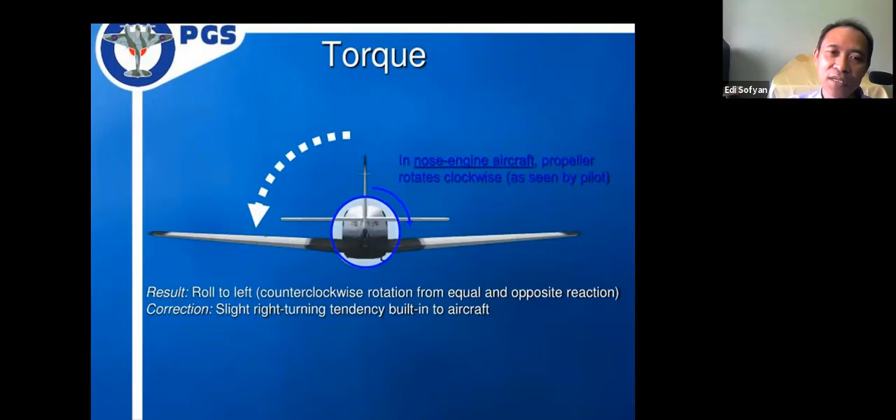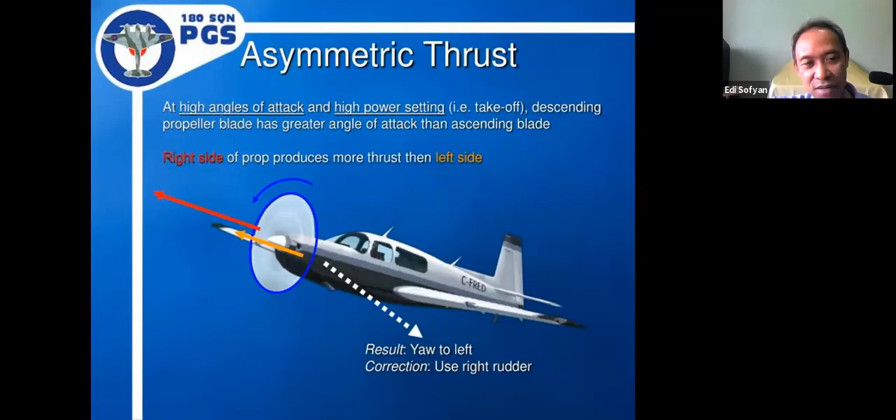Pada saat dia climb, tentunya sudut serangnya yang atas sama yang bawah berbeda. Karena sudut serangnya berbeda, makanya ada perbedaan gaya. Dengan berbeda gaya akan ada yaw, dalam hal ini dia akan bergerak ke kiri. Jadi kompleks, keberadaan propeller itu akan banyak sekali mengganggu prestasi terbang.

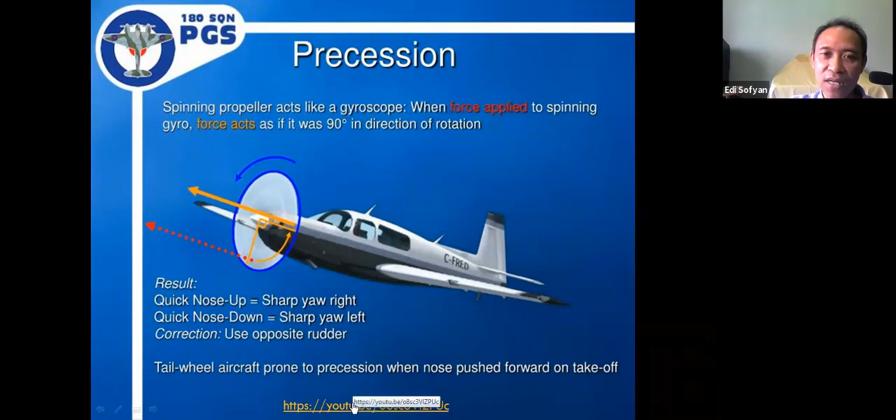Lalu ada yang namanya precession. Kayak gasing lah precession itu, karena dia berputar makanya akan ada gaya-gaya tambahan. Nah, kita lihat gaya-gaya yang ditimbulkan pada saat propeller itu bekerja.

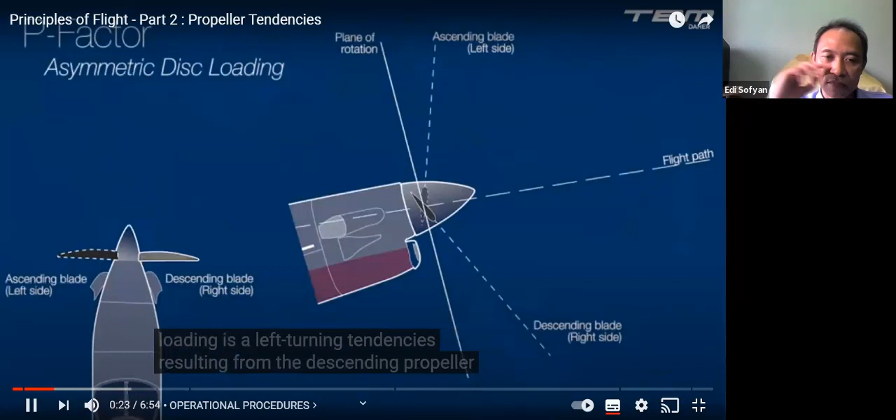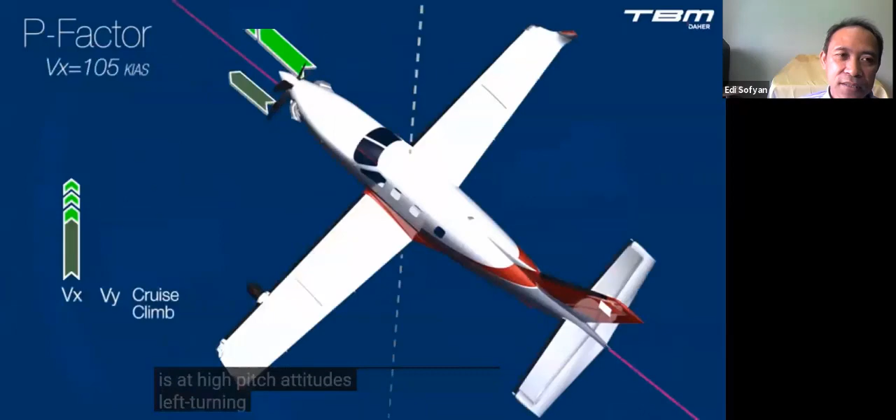P factor, also known as asymmetric disk loading, is a left turning tendency resulting from the descending propeller blade's higher angle of attack, which creates more thrust than the opposite ascending propeller blade when the aircraft is at high pitch attitudes. The left turning tendency is strongest at lower speeds, such as during takeoff roll, after the point of rotation, and during steep initial climbs at lower speeds, such as Vx and Vy.

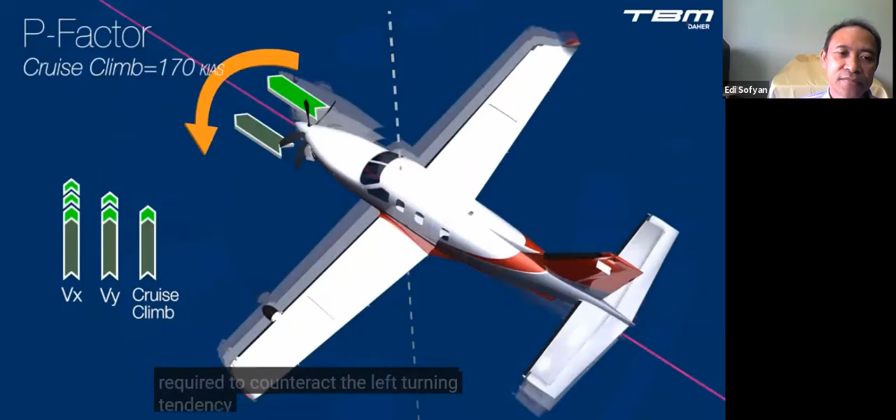As the angle of attack is reduced, less and less rudder force is required to counteract the left turning tendency. The propeller slipstream exists throughout the speed envelope and creates a nose left turning tendency, which is pronounced at lower speeds and decreases proportionally with increases in speed. Torque influences roll about the longitudinal axis, a counterclockwise rotation of the fuselage when viewed from the cockpit. It is also prominent at lower speeds.

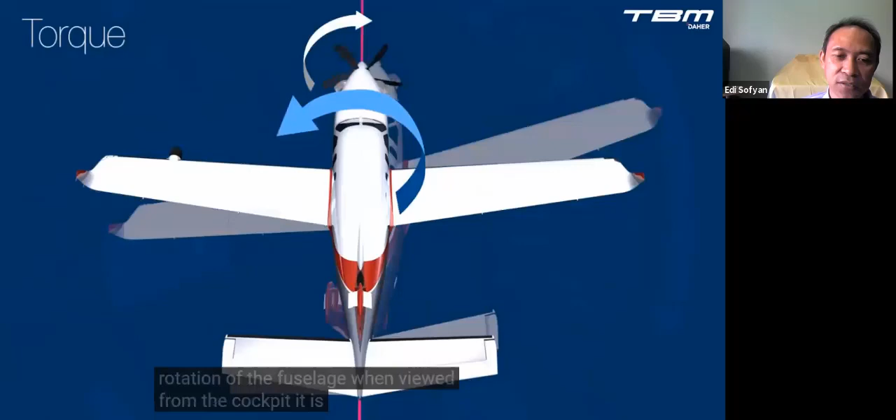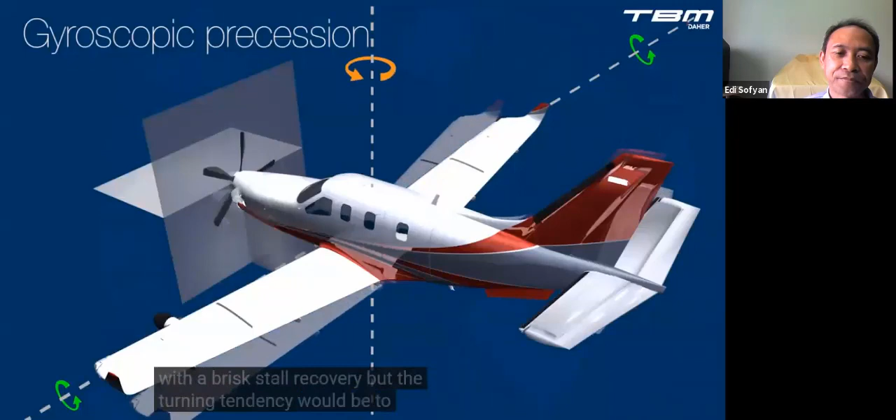Respecting rotation speed and minimum approach speed provides control authority against the effects of torque. Aggressive pitch-up transitions, as in a rapid rotation at takeoff, creates a nose-right turning tendency, gyroscopic precession. The same is true with aggressive pitch-down transitions, as with a brisk stall recovery, but the turning tendency would be to the left. The effect is also more pronounced at lower speeds.

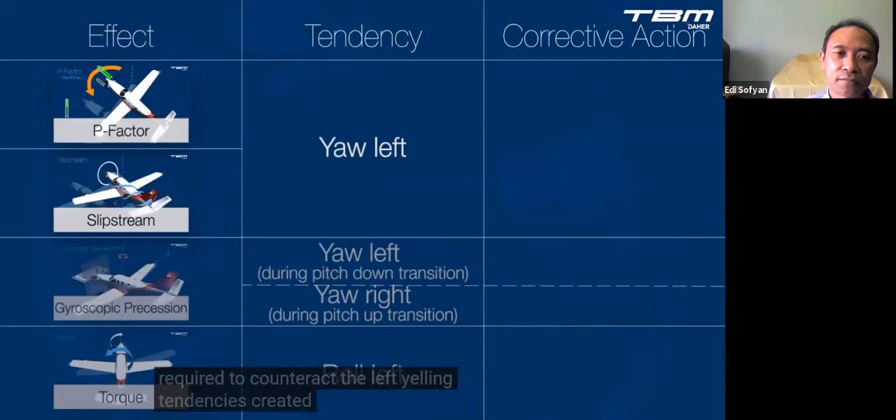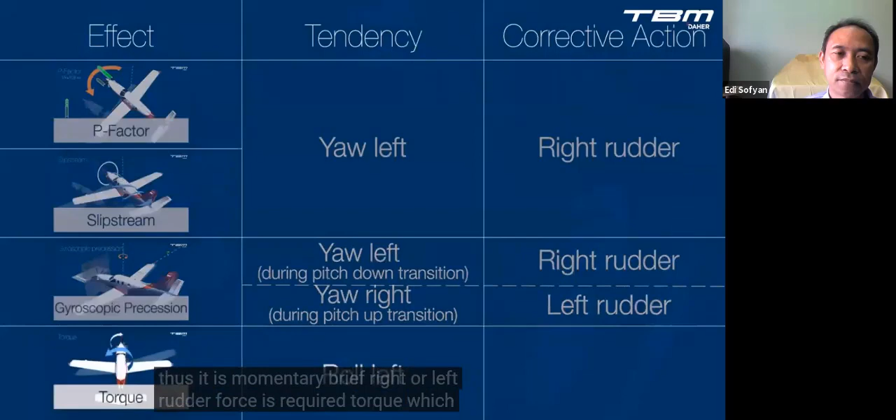Understanding the flight control inputs required to counteract the left yawing tendencies created by P factor and slipstream is straightforward. Right rudder force is required. Gyroscopic precession, another yawing tendency, is apparent during pitch changes, thus it is momentary. Brief right or left rudder force is required. Torque, which is most obvious with an abrupt increase in power, is different.

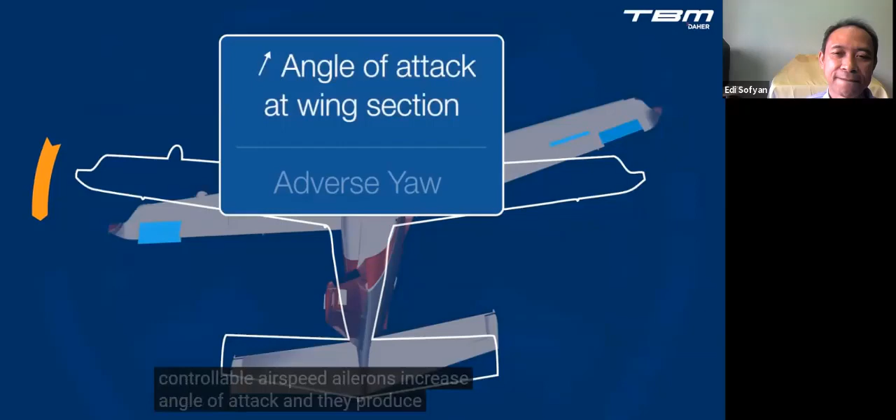Torque induces roll and is strongest when flying slowly, when the weather vaning properties of an airplane are at a minimum. Earlier we mentioned that the primary flight controls used to roll an airplane were the ailerons, which is true. Unfortunately, ailerons have two byproducts which are undesirable when flying at minimum controllable airspeed. Ailerons increase angle of attack and they produce adverse yaw.

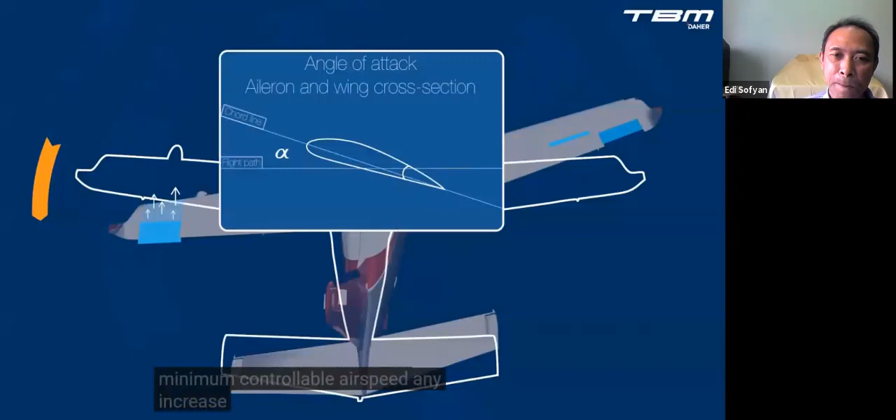On all airplanes, the lifting aileron increases the angle of attack at the associated outboard wing section. Lift is manipulated to roll an airplane. Therefore, if one is truly flying at minimum controllable airspeed, any increase in the wing's angle of attack would exceed the critical angle of attack, resulting in a wing stall.

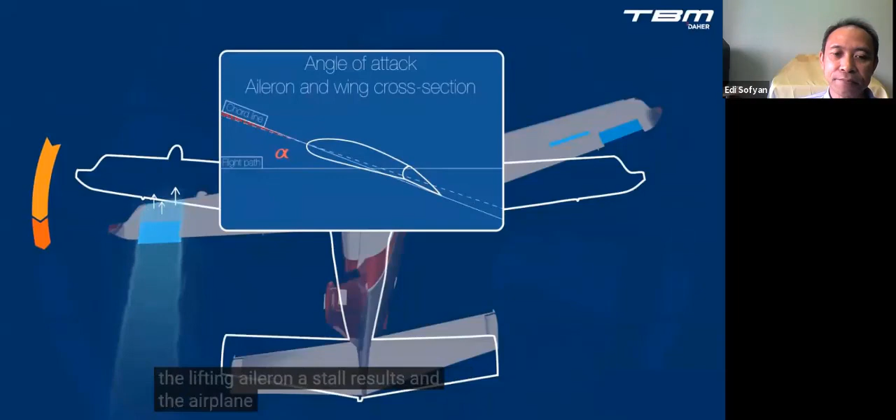Moreover, if the critical angle of attack is exceeded by the lifting aileron, a stall results and the airplane rolls in the direction of the stall. Applying more aileron worsens the situation.

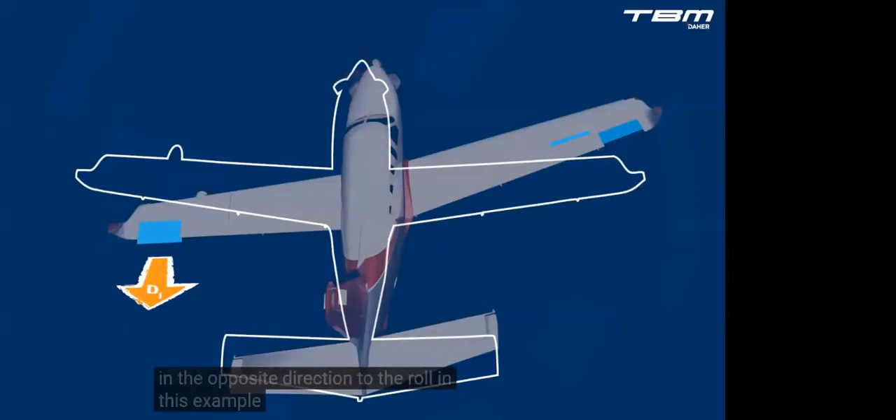Regarding adverse yaw, when increasing lift, an aileron also induces drag, which pulls or drags the nose of the airplane in the opposite direction to the roll. In this example, if one wanted to roll to the right, to wings level, the nose would yaw to the left, against the desired direction of movement. This is also an undesired effect when maintaining coordinated flight at minimum controllable airspeed.

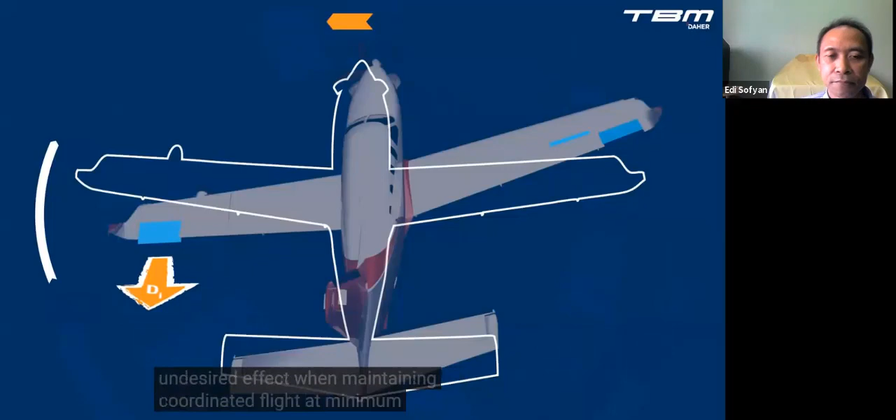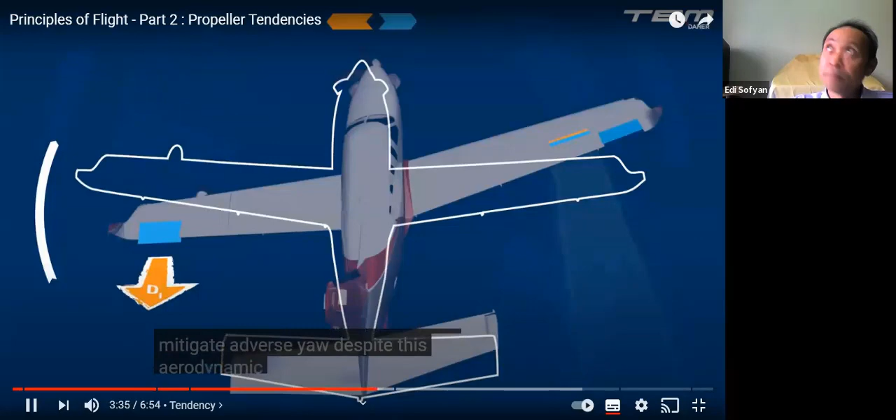The TBM's advanced aerodynamic design incorporates spoilerons, which assist with roll control and mitigate adverse yaw. Despite this aerodynamic advantage, one should manage propeller's rolling and yawing tendencies by giving the rudder priority for roll control when maneuvering in the low-speed regime.

For the purposes of this review, the pitch attitude is set. The indicated airspeed is accelerating through 55 knots. The aircraft is light on fuel. Payload is at a minimum, and only the pilot is on board. Since the aircraft is light, with a high power setting at a low airspeed, the optimum conditions exist for the propeller's effects on the airframe.

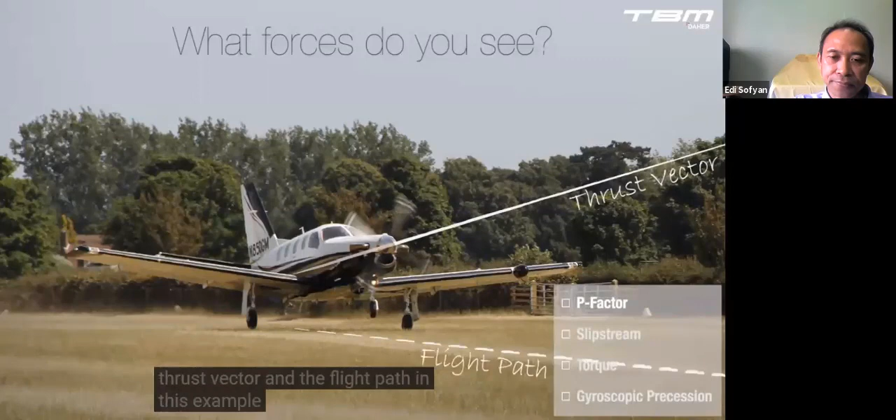Can you visualize the angle between the thrust vector and the flight path? In this example, the flight path is the ground run. With power at 100%, the left turning tendency resulting from P factor is at a maximum. With maximum power and minimum aerodynamic control due to the low airspeed, a strong slipstream is curving around the fuselage and impacting the side of the tail, inducing a left turning tendency. With a high power set.

Jadi ada 4 hal di sini yang terjadi kalau ada propeller di depan: ada P factor, ada slipstream tadi, ada udara yang berputar-putar, ada torsi karena dia berputar, dan ada gyroscopic precession. Jadi ada 4 hal ini yang menyebabkan masalah pada saat ada propeller.

At lower speed, the rolling tendency caused by torque is at a maximum. It is easy to see the wingtip clearance, or look even closer at the difference in the strut compressions. See the rotation of the fuselage. The wide stance of the TBM's main landing gear provides stability.

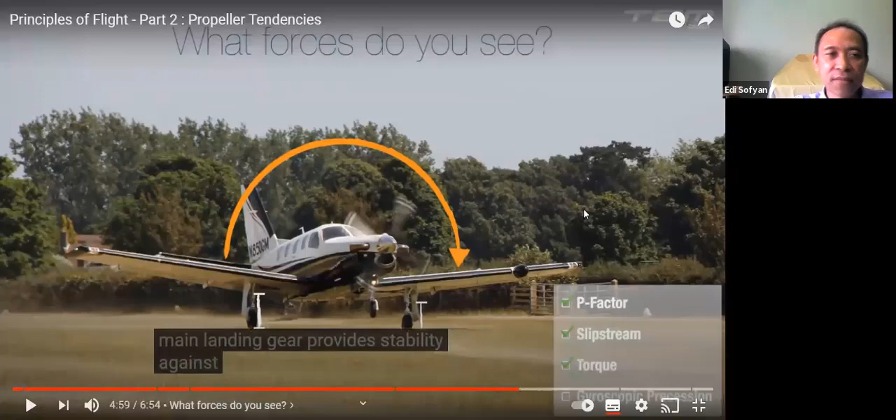Ya, intinya itu, Anda bisa lihat lebih lanjut. Tapi intinya bahwa prestasi terbang itu banyak sekali dipengaruhi oleh elemen-elemen yang ada di pesawat tersebut, terutama kalau ada propeller. Ya, ini ada slipstream.

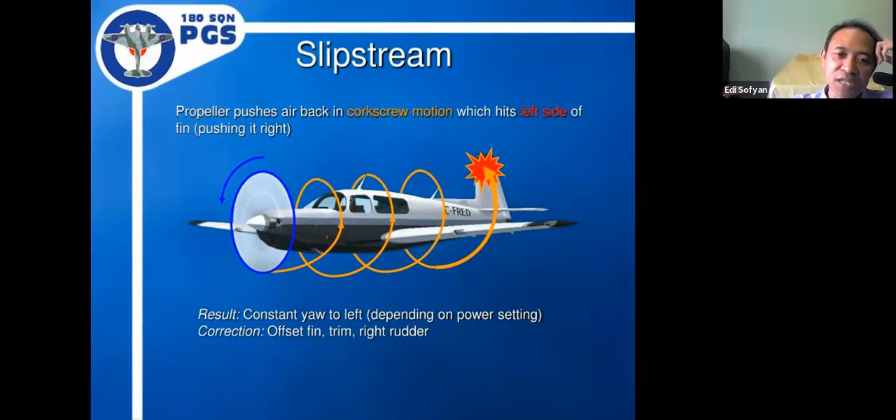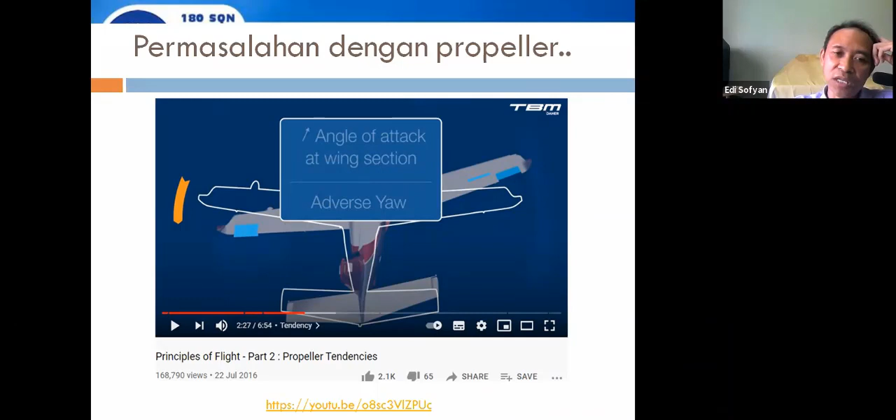Ya, ada namanya slipstream, jadi ada putaran-putaran udara ini yang di ujung pada saat dia menyentuh rudder akan jadi belok. Jadi bisa jadi yaw gara-gara ada slipstream. Permasalahan-permasalahan dengan propeller tadi sudah dilihat, ada adverse yaw. Jadi adverse yaw itu kalau Anda suruh belok kanan malah jadi belok kiri, atau belok kiri malah jadi belok kanan. Itulah permasalahan-permasalahan kalau terjadi dengan propeller.